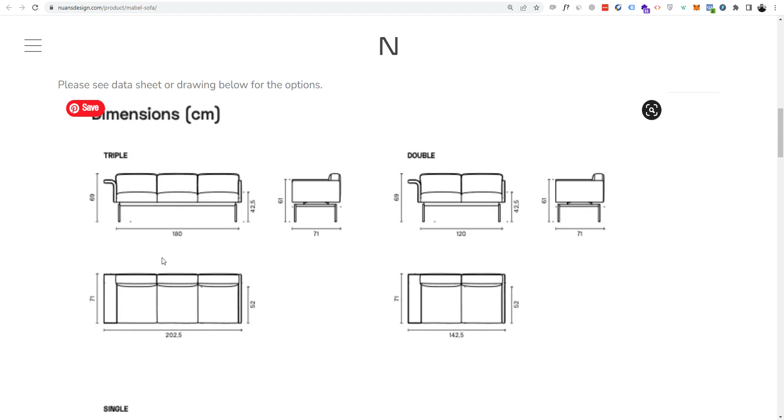We are here on the website where we have some specifications. If I zoom in a little bit, this is 180 centimeters, this is 69 centimeters, and this is 52 and 71 centimeters. I have taken a screenshot and added it in the project files, so you can download it to see the dimensions more clearly: 69, 180, 42, 71 this way, 61 this way. This is going to help us a lot in 3ds Max.

So let's get started. First of all, in 3ds Max, this is how it looks like when you open it. The first thing you are going to do is come here, customize, unit setup, and choose centimeters, and from system units, also choose centimeters. So both places we should have centimeters.

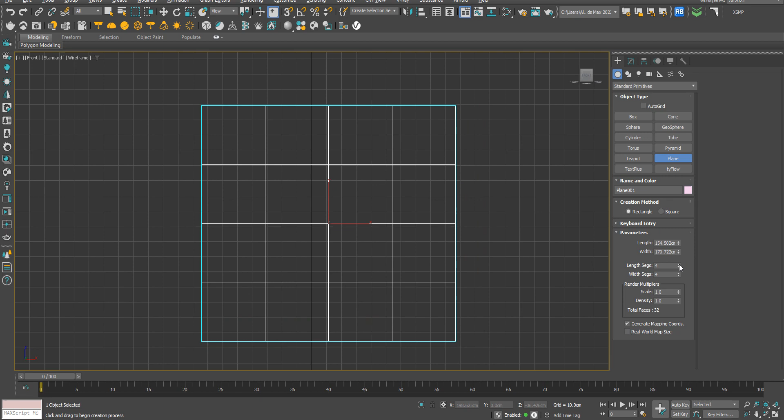Once we have selected that, I am going to press Alt W in the perspective view, which I have selected. This yellow outline indicates that this view is selected. Press Alt W, press F for front view, then plane, and I'm going to draw a plane with length segment 1, width segment 1, and for now let's go with 150 and 150.

I will press F3 to see the shaded view, since this is wireframe view by default. I hope you have gone through the basic lecture of 3ds Max, but yeah, F3 for the shaded view.

Then I press W to activate the move gizmo, and I will right click here on these tiny arrows to bring it into the center. Now you can see our gizmo is exactly in the center.

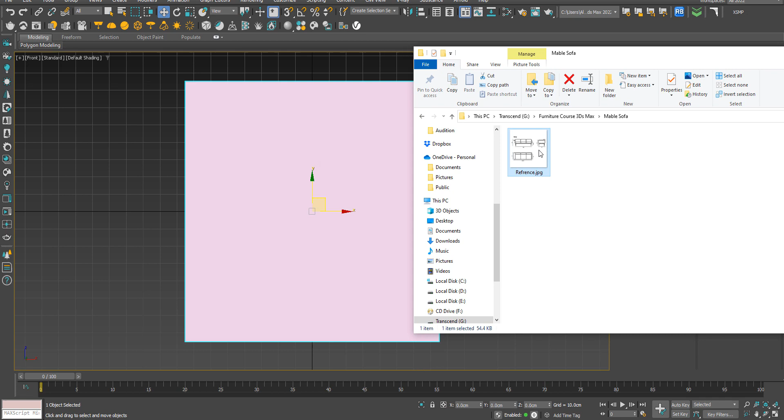So this is the plane we just drew in front view. Now let's drag and drop the reference image which we just created onto the plane.

A lot of my students complain that they are dragging and dropping the image, but it is not displaying. The reason behind this is the plane is not in the shaded view. In wireframe, when you drag and drop, it gives you very different options which are not relevant. So make sure you have the shaded view, and then you drag and drop.

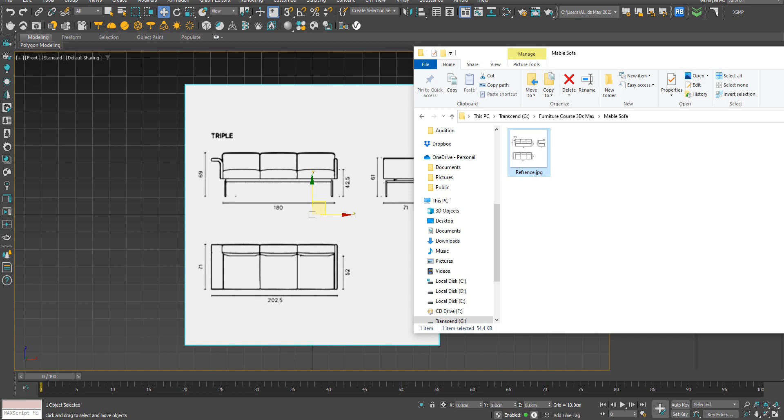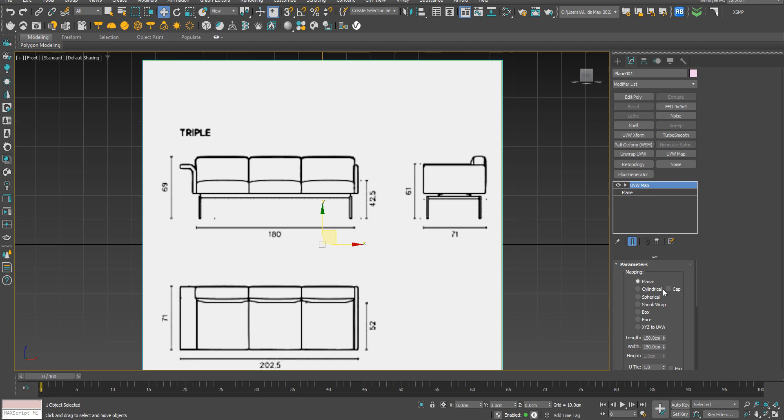Some students complain that this doesn't work even in the shaded view. That is because of the UVW map. We can discuss this later, but right now, if the image doesn't display, or it is multiplied a lot of times, that is because of incorrect mapping. So just apply a UVW map modifier, and this box will be checked. When it is checked, you can see a lot of multiplications, so just make sure you uncheck it. Since I'm not having that issue, I'm going to delete the UVW map, but if the error occurs with you guys, you can do as I suggested.

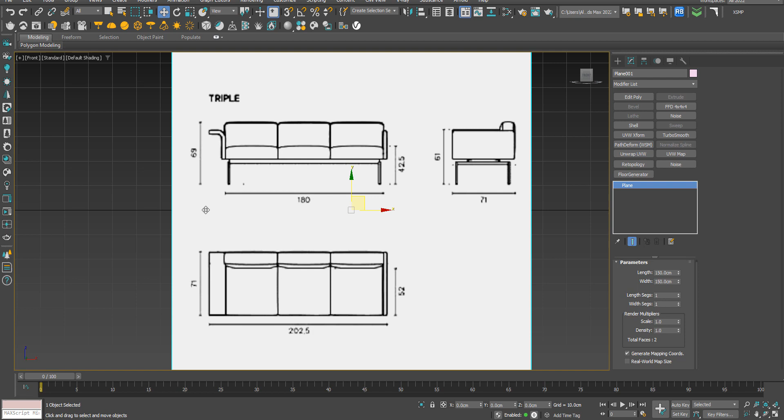So the next thing is we are going to scale the image properly. To scale, I will draw a rectangle, and the width of this rectangle should be 202. Let's see which one we are talking about—not this guy, this guy. All right, it should be 71 by 202.

Even if we do 202, that still works, because even if we scale on just one dimension, that is also fine and it is going to work. Need more... okay, scale it down a bit, a bit more, need to scale a little bit. Perfect. So now you can see this rectangle is equal to 202.5, and that is exactly equal to the width, which means our image is properly scaled.

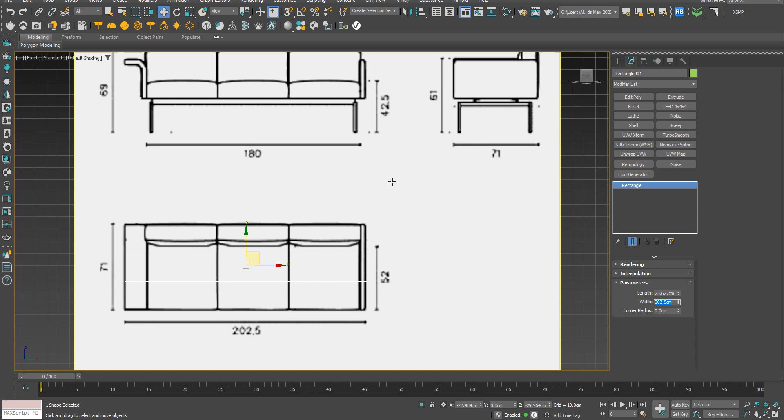Now whatever we draw, that will be accurate. To test this, let's do 71 for this length. All right, so you see this is perfectly well balanced.

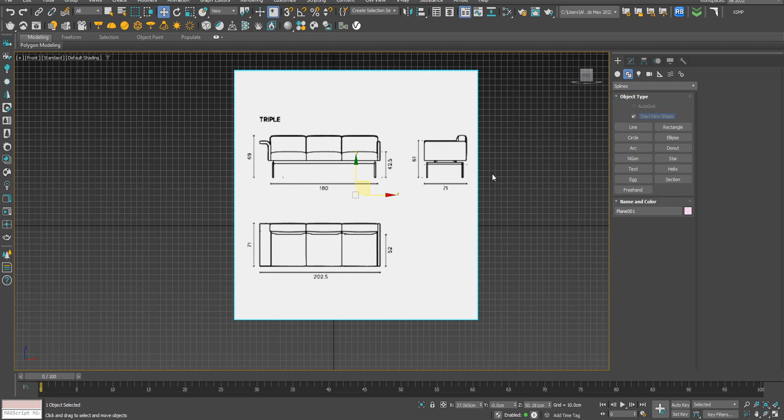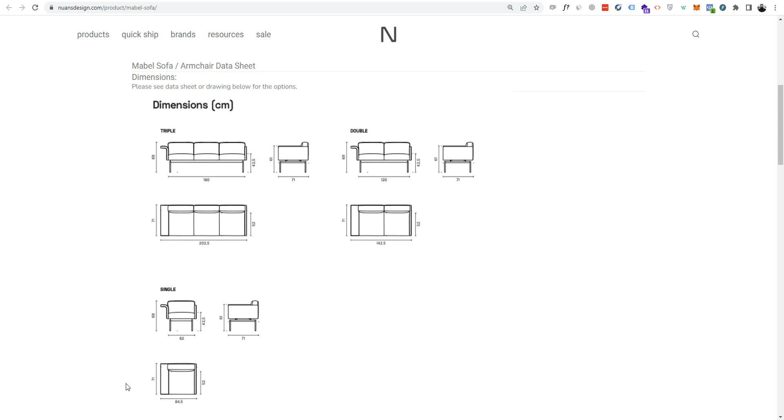Now I am going to delete this rectangle because that was just for scaling purposes, and I'm going to select the plane again, press W and move it into the center again by right clicking here. This is just for my own satisfaction—it's not compulsory that you move it into the center, but it's an additional thing. So let's keep an eye on what we get. First of all, I would like to start from the bottom part, this guy here.

In some of the articles it does have the bottom part, but in some it doesn't. You see, this one has the bottom part, but this article doesn't. I personally like this bottom part, so I would like to create that.

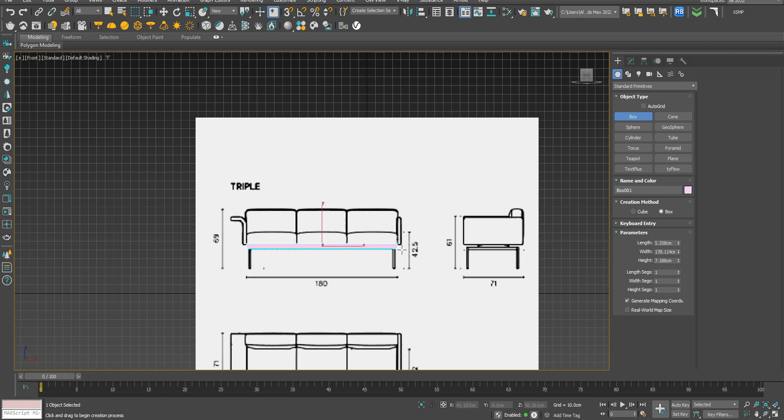Let's create a box and see from where it is. This is from this point to this point. Let's see what is the length - it is about 71 centimeters.

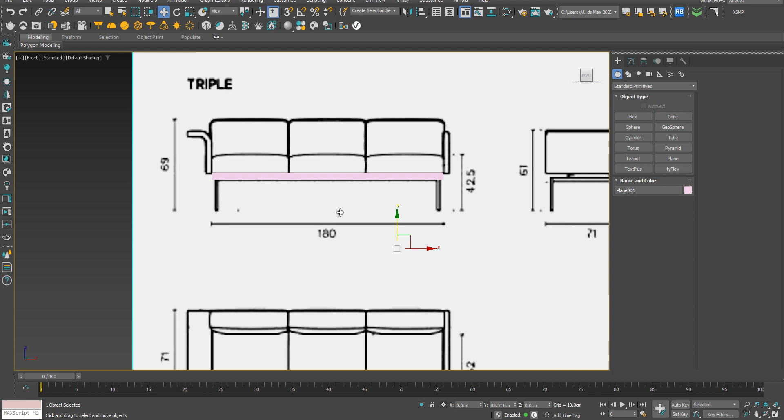Let's see which length is 71. This one is 71 centimeters, let's make it 71. I'm going to move this guy from the top a little backward so I can see everything properly. I'm going to press G to hide the grid. Alright, we have it here. I'm going to change the color of this box so I can easily see what is going on. Perfect.

Next thing I'm going to do is press F4 so I can see the edges in shaded view, plus the edges you can see here. I'm going to right click, convert to editable poly, and then select these edges.

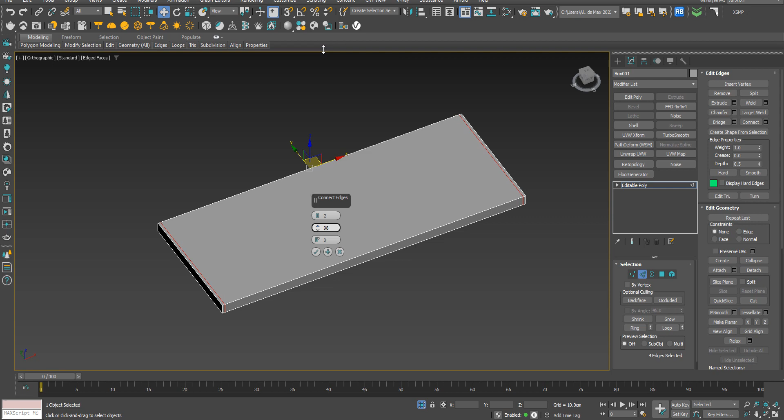In the top view again, I dragged and selected these edges - make sure you follow me. I can see two edges from the front, two edges from back, nothing else selected. I'm going to press connect and set the value of 2 and add the distance of maybe 98. Alright, looks good.

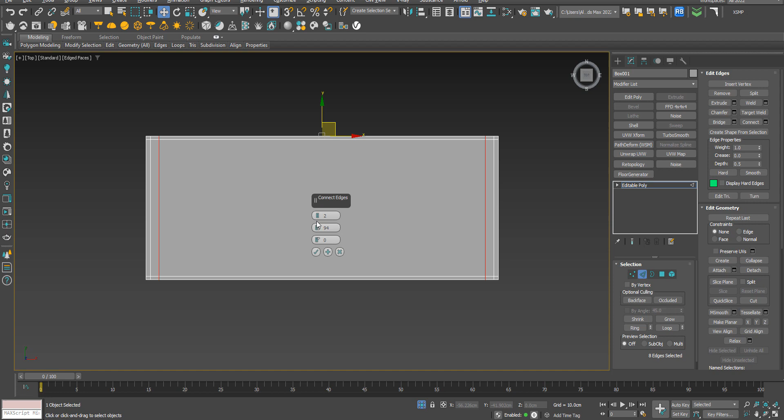Select this guy again, press connect. Now I have all the edges on the left and right, no edges from the top or bottom, just right, and press connect. Okay, boom. Select the guy here, connect again, and now let's make it maybe 3.

I will explain in a couple of minutes why I have added the additional edges. Select this guy again, press connect, and maybe make it... okay, perfect.

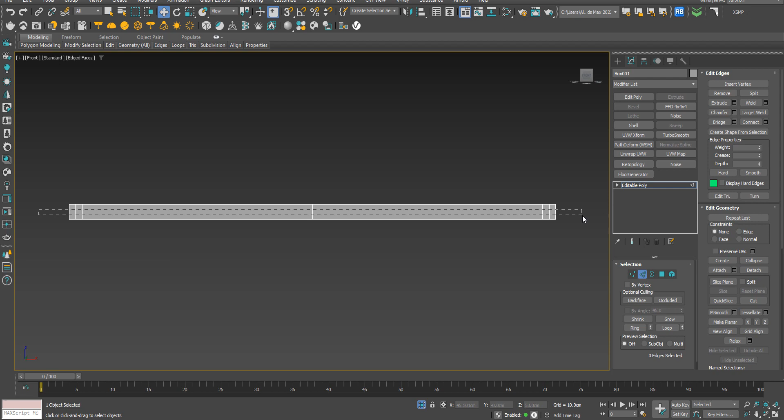In the front again, select these guys. Make sure you have these guys, not any of the edges from the top, only the ones in the front and the back. The other way of selection is you select one edge and click on this ring button, so it will select all the edges around.

Let's apply TurboSmooth now and see how it looks like. Okay, let's see in the real one. Perfect, that is very well balanced, I think. I'm pretty much satisfied with what we have here. Maybe we can increase the iterations to 2, press F4. Yeah, looks really good to me.

The next step is, if we see in the real one, we have this piece here, so we are going to make that one. So I am going to create a box. Do you guys remember what was the width of this? Okay, no problem, we can create a box.

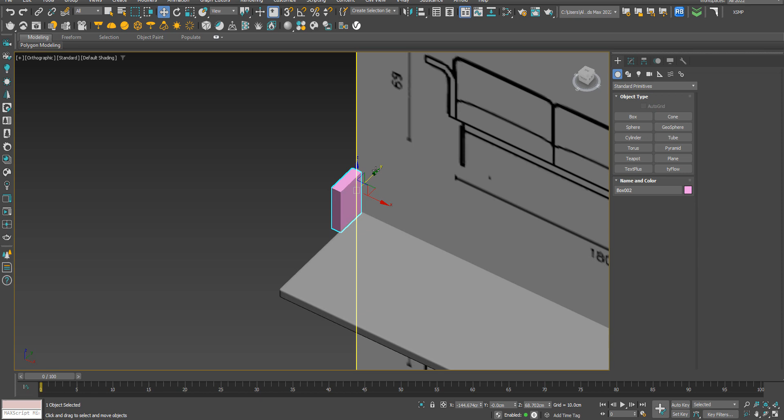Sorry, simply select and drag, and on the third click let's move it. Instead of moving, let's add the width, which we added - 71 centimeters. Which one was that? No, this one - 71. Perfect.

Very, very well done. And this guy here, I think we should keep it 5. Maybe we can increase this later, but if we want to check what really it is, we can rotate it 90 degrees, and yeah, I think that's pretty much 5.

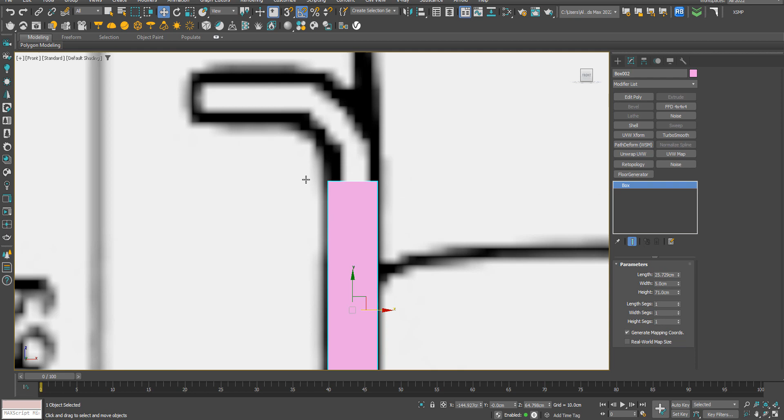Alright, press Ctrl Z, move it slightly there. So let's add edit poly modifier. If you add edit poly, or you right click and convert to edit poly, that's pretty much the same - there's just a very slight difference, but that's really up to you.

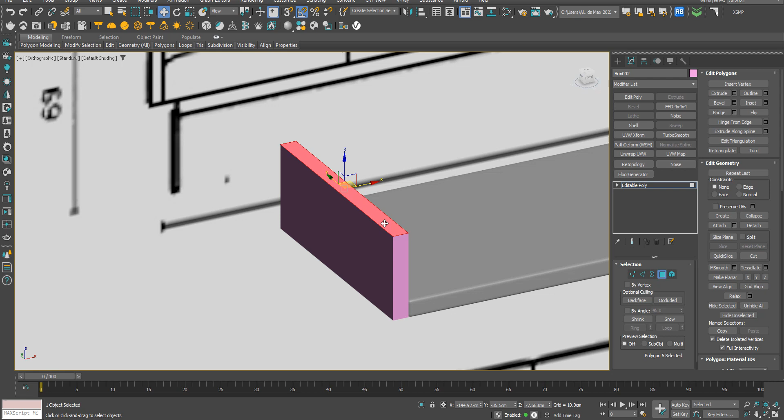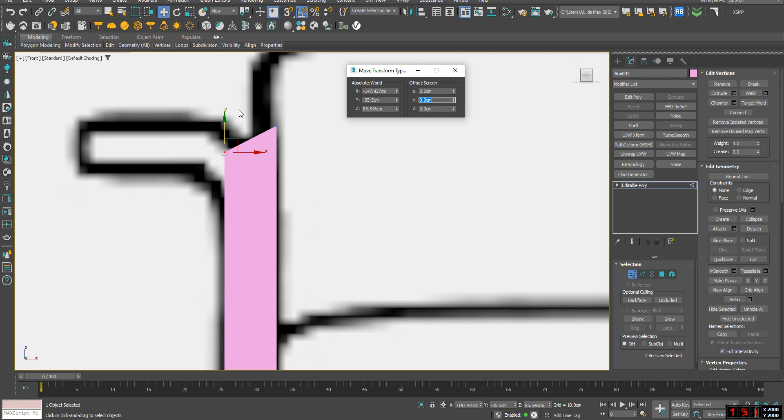Alright, so I have selected this face and deleted it. Boom. The next thing is I am going to move this guy here. Select this guy here and let's move it 2.5, minus 2.5 on the y-axis. Alright, let's see how this goes. We can redo it, but no, that's all right.

So let's do one thing - I have selected the edges. Press F4 and change the color to gray. Alright.

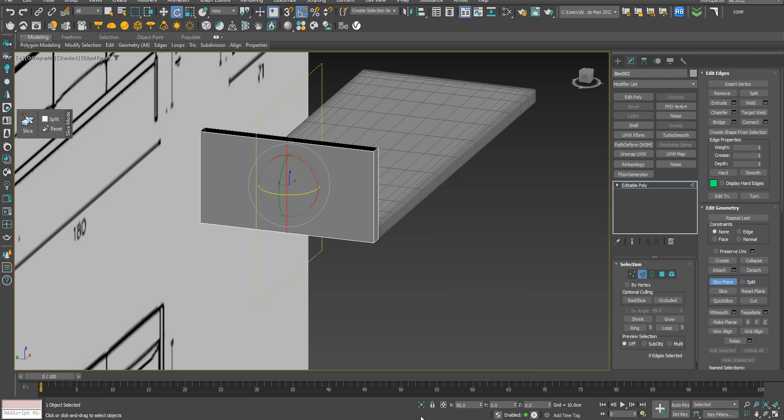The next thing is I am going to use slice plane, so it is going to cut on our required point. Let me explain what happens. I have this plane here which is cutting, so I'm going to isolate with this button. Okay, perfect, isolated. Now slice plane, and now you can see this is a plane which is going to cut - but I don't want a cut in this way, so I will rotate this plane 90 degrees. You can see in the bottom the exact number. It should be 90. If you don't have the exact number, just press A - it will toggle the angle snap, so it will be easy for you guys to snap it correctly.

So this way, and then I will add 45 degrees this way. Perfect, move it up.

All right, now I am going to click on the slice. That confirms our slice is in. Now I'm going to delete this guy here, and we have this, which looks pretty good, honestly.

The next thing is we are going to select the border. So you can see I have selected all the borders. Press and hold shift and move this on the x-axis. Make sure you move on the right axis, this is very necessary. Move this guy a little bit up, and this guy here move it backwards.

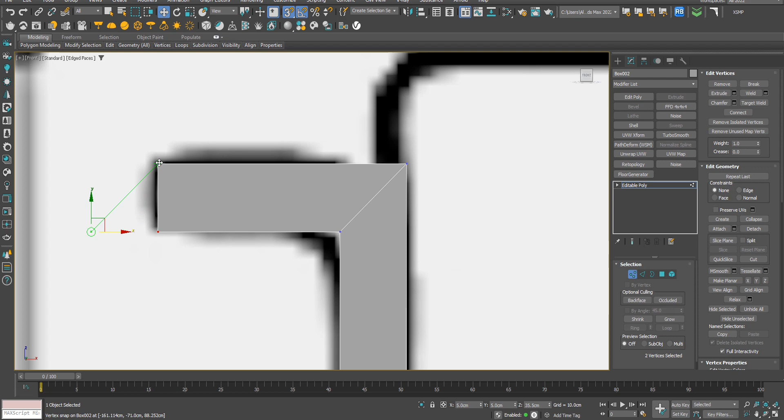Press S for snapping, so you see I have only x-axis active. Make sure when you are moving on the snap, do not click here like this, otherwise you will mess up. Just click on the axis you want to move. I want to move it on the x-axis, and snap it with this guy here, so it's exactly well balanced. Perfect, so I'm going to move slightly outside on x-axis.

Now the most important stuff, I selected this guy, double click on the edge, so I need to make sure that all the loop is selected, right? The next step is I'm going to press chamfer. Okay, here it is. Click on the box and add some amount here.

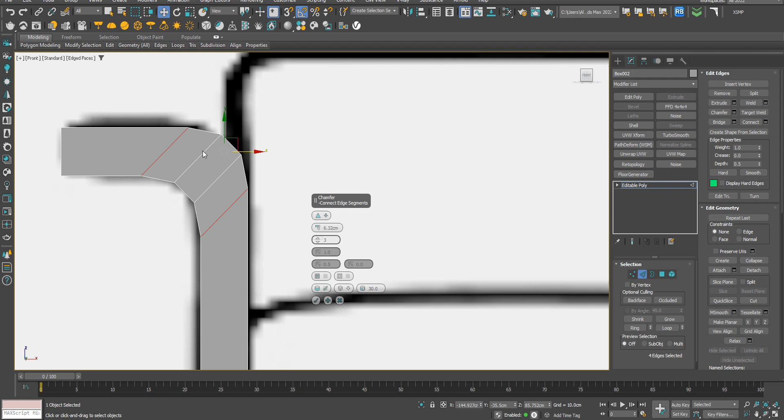All right, let's make it triangle and add another, perfect, maybe 3. There are a couple of options you can try: uniform, radial, patch, whatever you want, but let's go for the triangle. Maybe 2 segments would be enough, or maybe 3.

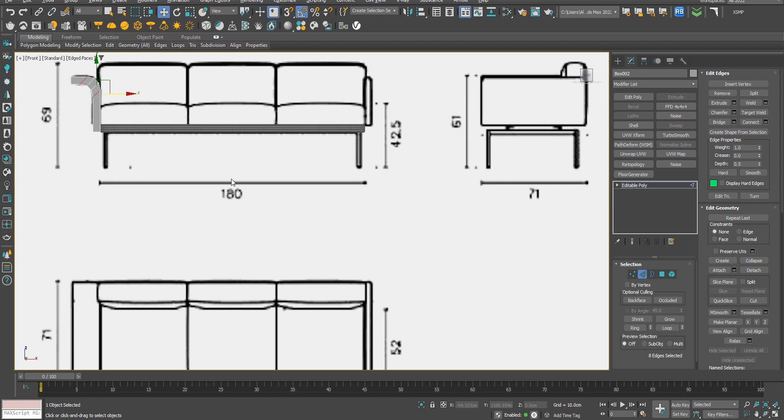This is pretty good, press OK. Now we have this, but the only thing is this part is slightly bigger, this area is slightly bigger than the rest. So what we are going to do, maybe adjust the inner guys, and if we need we can adjust the outer as well later.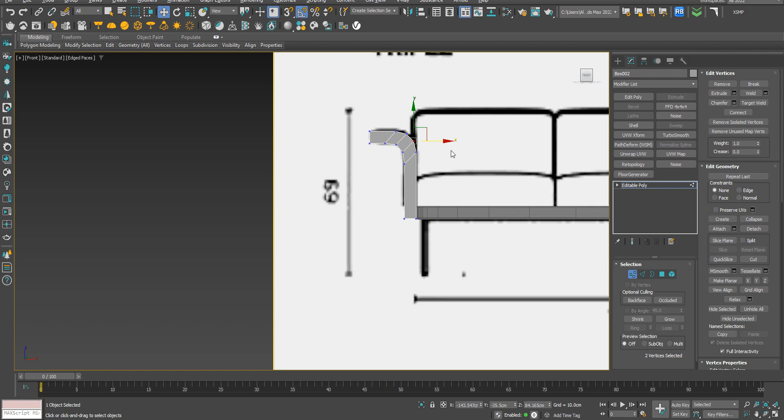Just to make sure to bring it a little closer, so the inner part doesn't feel very bad or big. Perfect. So if we see, now that is a little soft from the front side and from the right side. That's not very sharp.

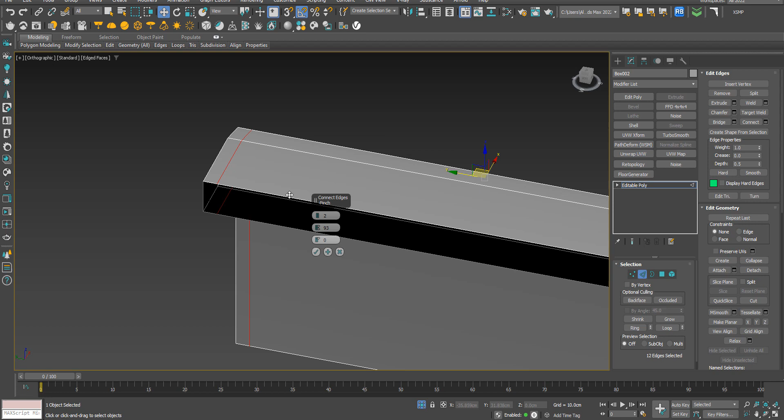What we're going to do is isolate this guy here, and we are going to do some magic. Select these edges, do connect again, 2, 3 maybe, okay for 2 for now. Later we can do 3. I did 3, yeah, I think that would be sufficient.

Connect again, 2, 3, and reduce a bit. Okay, perfect.

Then select these dudes here, and from the front connect again, let's make it 1, maybe 2, and reduce this distance. All right, and just select, double click and select this guy here, the whole loop, and press R and scale it on the z-axis so it is straight a bit.

Okay, looks good to me, honestly. A little bit lower, and I think this guy here should move little upwards. Same for this guy. Okay, yeah, looks perfect.

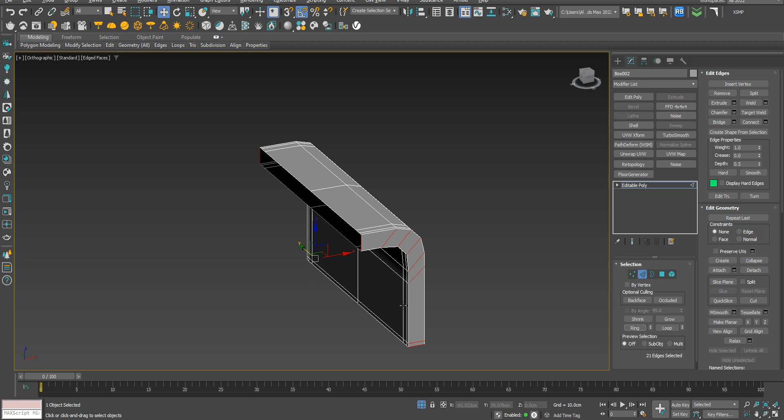Next thing is we are going to select this edge and select the ring, so everything is selected from here to there. Okay, now press connect, and let's make it 3.

All right, sounds good. And I would like to add one more edge here. I'm going to select this, connect. Now I'm going to add one, and make it straight with the scale, pressing R, and scale it down, move it down a bit.

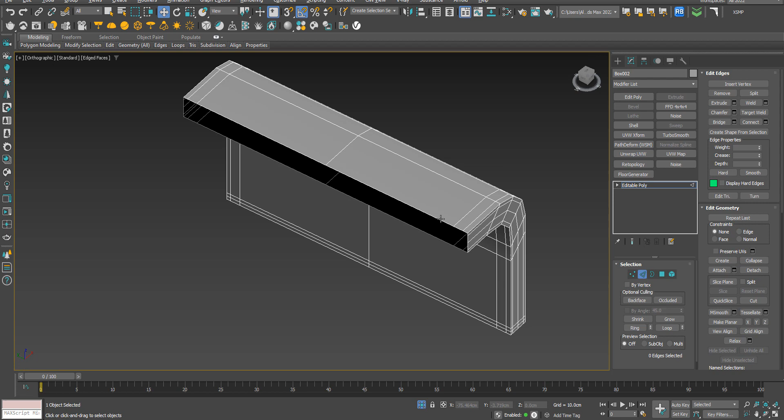I'm pretty much satisfied honestly, but let's try TurboSmooth, see how it looks with 2 iterations. Looks good, but the only thing is this part is still slightly bigger, as we were discussing earlier. This guy here is slightly bigger, so we are going to adjust it a bit.

Select this and move it this way. This.

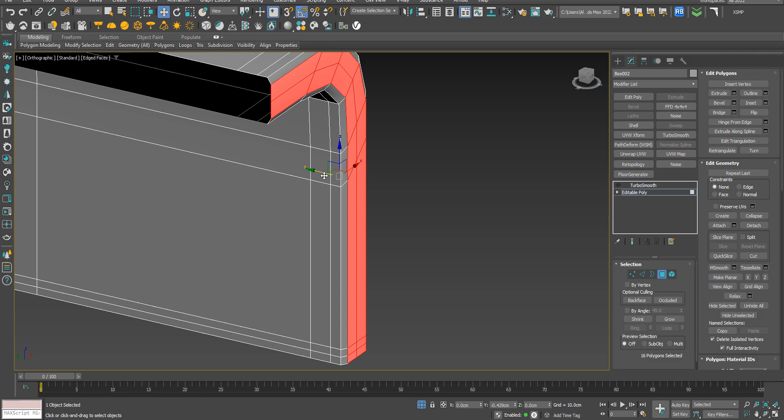Another thing I think we should be doing is, let me select this guy here, and push it slightly outwards so it feels like a round shape. That will look really amazing when we TurboSmooth it. Okay, yeah, looks really good.

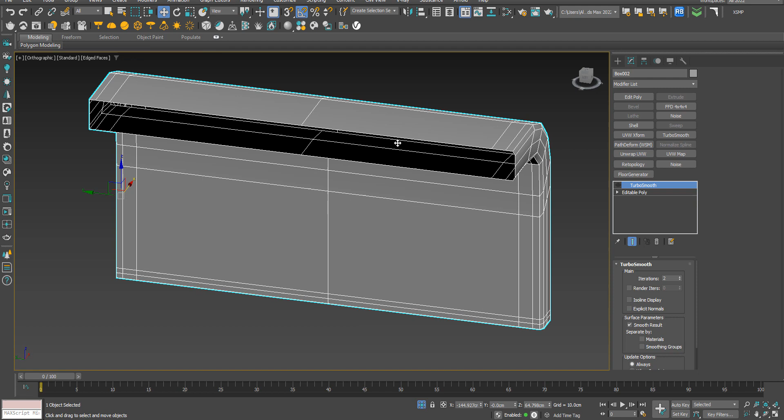All right, the next thing is we are going to close this edge. So come to the edit poly, select this edge and this edge, press bridge, this edge and this edge, press bridge, this guy and this guy, press bridge, and this guy here should be cap. Perfect.

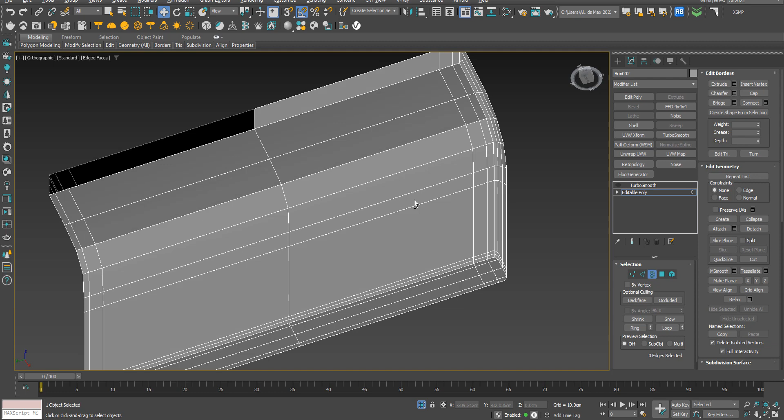So this guy, this should be bridge. This, sorry, should be bridge. Should be bridge. All right.

The next thing is we are going to connect these edges. Say cut, and you cut it from here to here. Okay, sorry. So you have to be very careful, it's not cutting right actually.

Control Z. Okay, let's do the left view, and now cut it from here to here. No, wow, sometimes 3ds Max sucks. Boom, good.

Then let's do the same. Good. And the same for this guy.

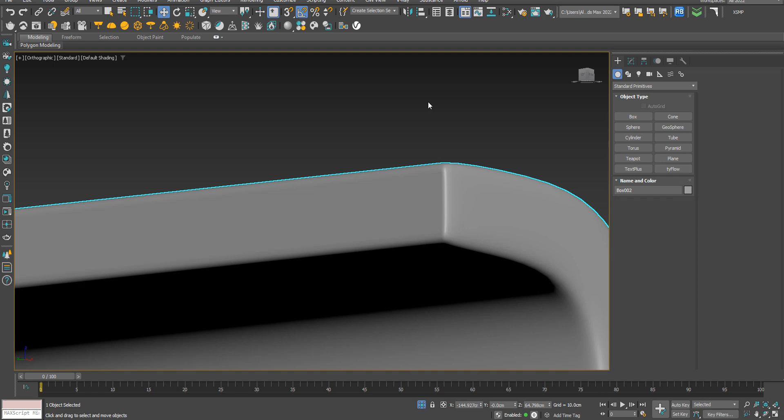Alright, another thing, we can maybe delete these dudes here, but let's see how it goes with the turbo smooth. Alright, I think that's pretty smooth. We really don't need any, but we can delete this guy here, that's creating a mess, honestly. Let's see how it goes.

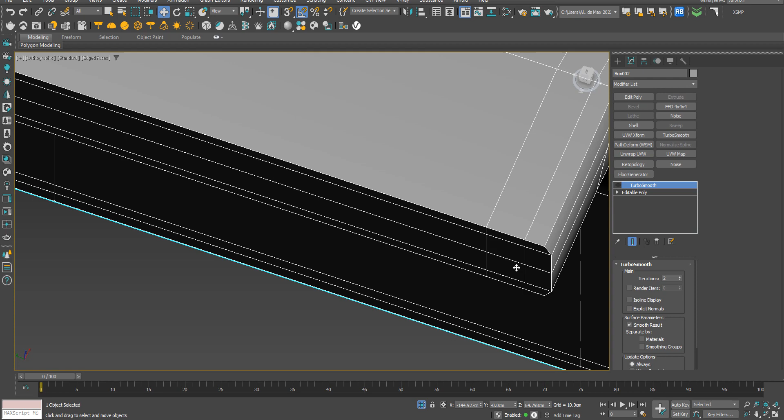This part is not quite smooth, so maybe we can move this guy, this guy slightly closer, or maybe the whole guy. Alright, looks pretty good to me, honestly.

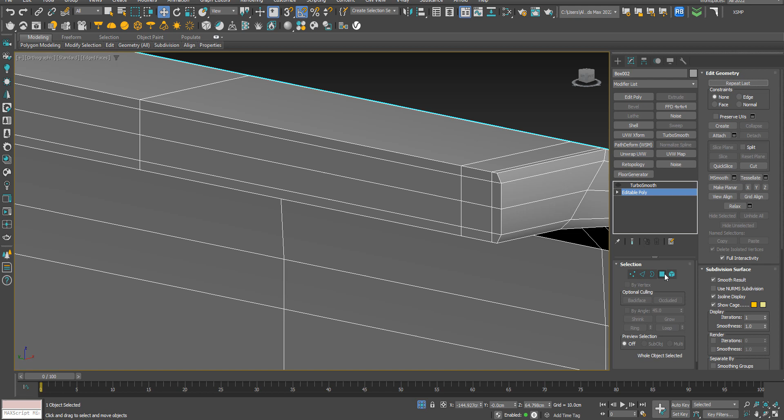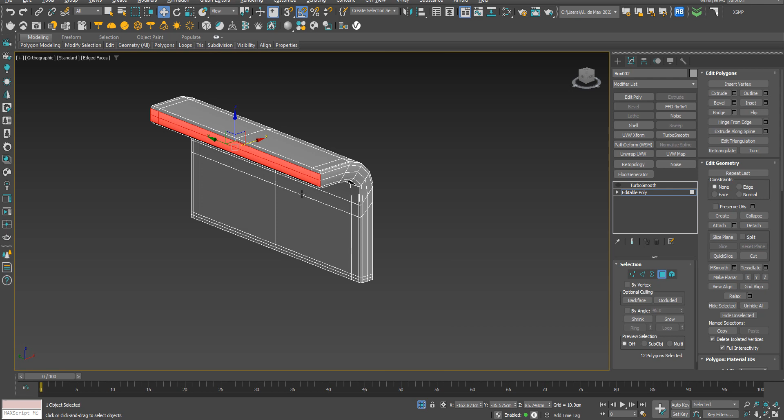And turbo smooth. Boom. Now maybe we can do the same thing we did previously for the middle part. This guy, this guy, this guy. Come to the top and maybe move slightly outwards, just like the front part. This will give a nice smooth curve, you know. Well, let's see turbo smooth.

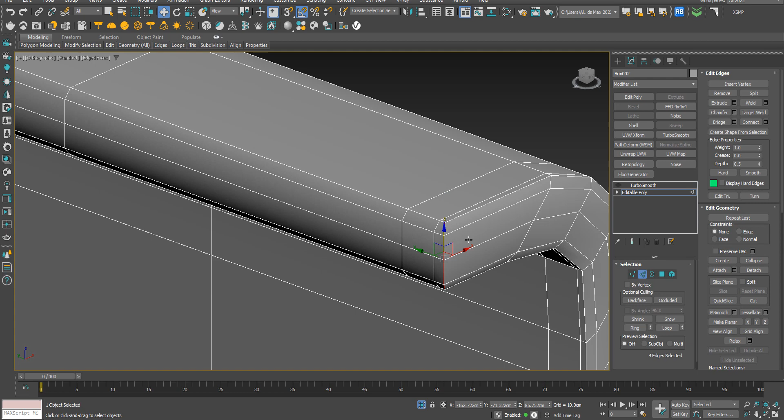Alright, let's see what's happening in the real photo. That sounds really good. If we want to further smooth this guy, what we can do is we can just select and press chamfer.

Alright, and move this guy slightly backwards. And let's see how it goes down. I think we unnecessarily gave an extra edge, which was actually not needed. So I'm going to press Ctrl Z, and let's see again. I think this looks good so far.

All right, we have a problem here, which means we didn't weld actually. So maybe we can select this vertex, this guy and this guy, and move them here. The snap. Perfect. And select these guys and press weld. Let's see if it worked. Yeah, that worked.

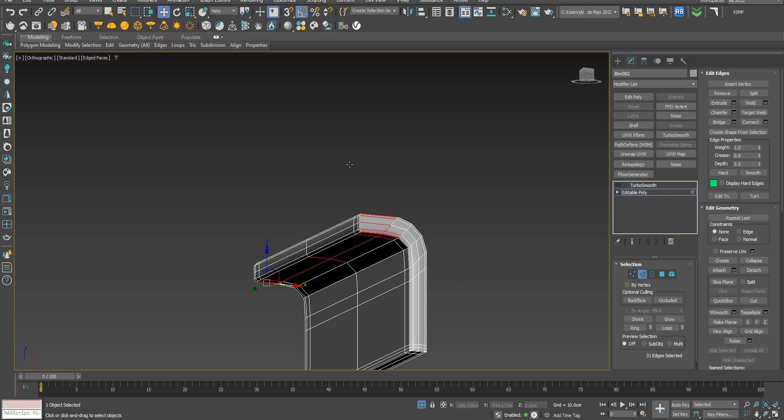So another thing I would like to do is I would like to connect this guy, maybe from the front, just connect it, and maybe let's move it. No, need only one, and let's add the value. Come to the top and press R to scale it on this axis front. Perfect. Let's see. Perfectly balanced shape. All right. Okay, looks good.

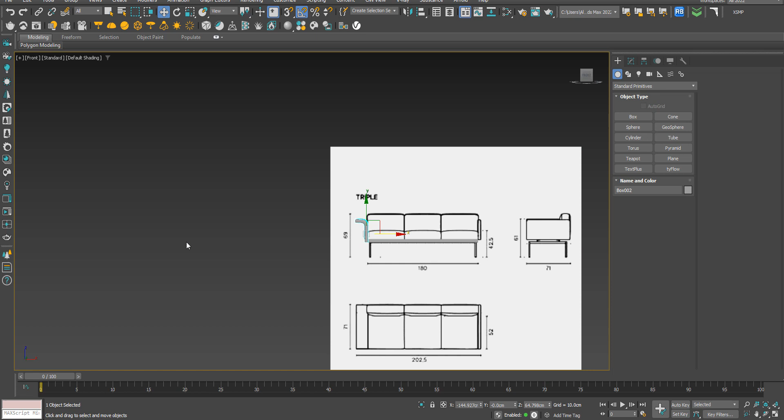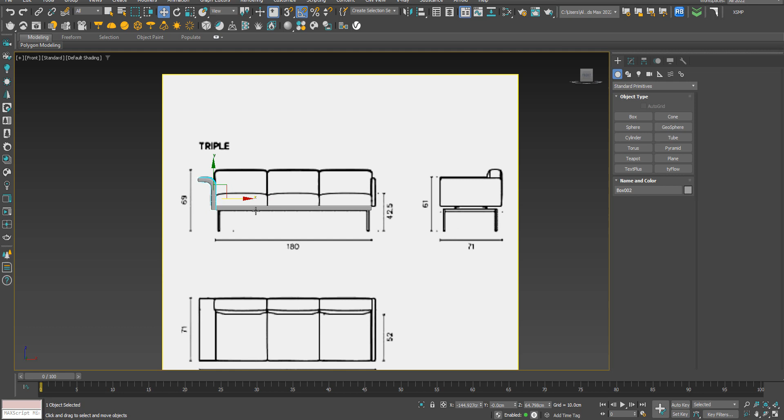So now we are going to make this guy here, which is quite straight and smooth. So the easiest and fastest way is, let's move this dude here, copy it, isolate this guy, turn off the turbo smooth. Alright, let's select these faces, delete, delete, and this guy too.

Okay, so we have this now here, and select the border and scale it down on the y-axis, so just to make it straight. Next thing is, let's mirror this on y-axis and make a copy. Perfect. W, move it here. Since we copied, so we can attach. Make sure you copied. If you have had instance, just make sure to press this button, unique. This is necessary. Attach. Okay, boom.

Now it's attached. Isolate again. Right. Select these vertices and maybe weld. Perfect. Good. Let's apply turbo smooth. Okay. Looks good to me, honestly. Just one thing, I made it slightly bigger, so let's move the vertices slightly downwards.

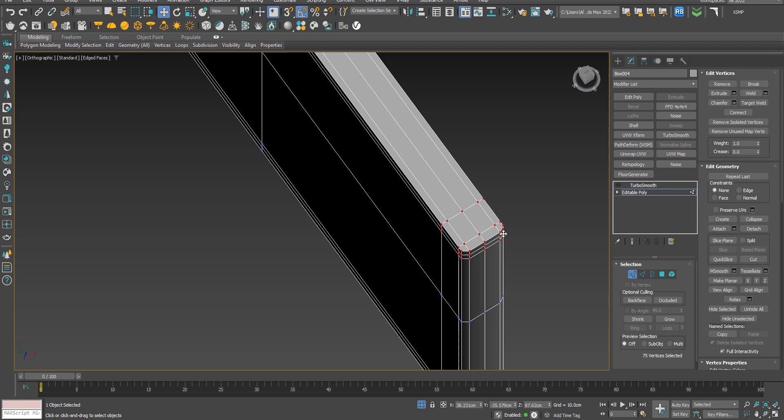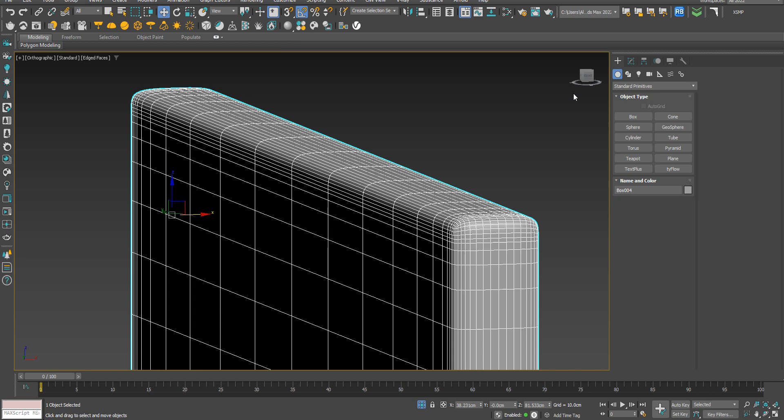Perfect. Another thing, let's press F4 to see the edges. We need to move these faces upward, just like we did previously. Slightly upward. Alright, apply TurboSmooth. Perfect. Looks so smooth, just like butter.

So let's save the progress for now. Sorry.

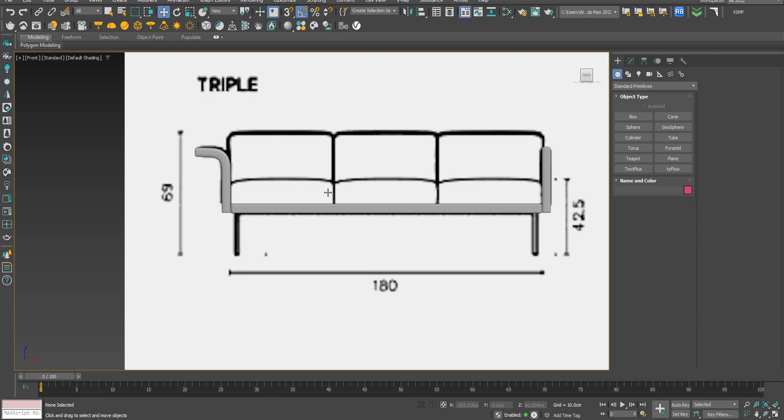Alright, sounds fair enough. The next thing is, let's see. So we are going to make this guy here with the help of a box. So maybe we can start from the top, and

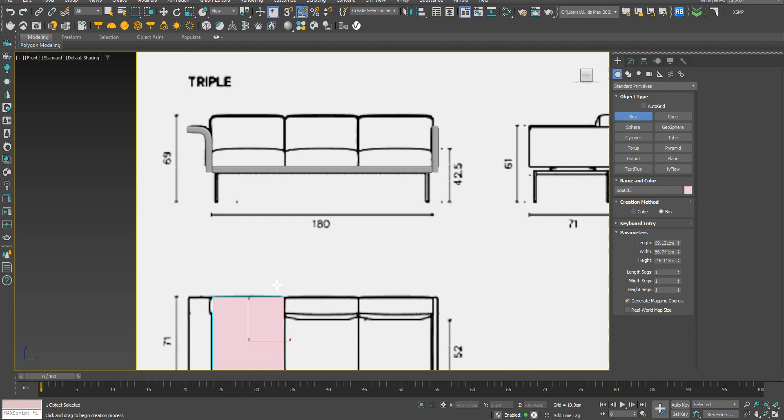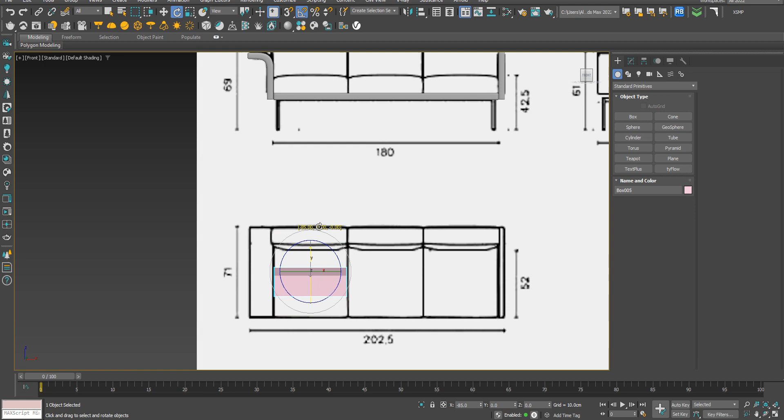This should be about 71. Okay, just remember that this time we are making the top, the box. Okay, the width is okay now. We can maybe rotate it on 90 degrees and move it up. Here, and adjust the height. That should be like, for now we can try 15, and we can amend later, maybe 13. Alright.

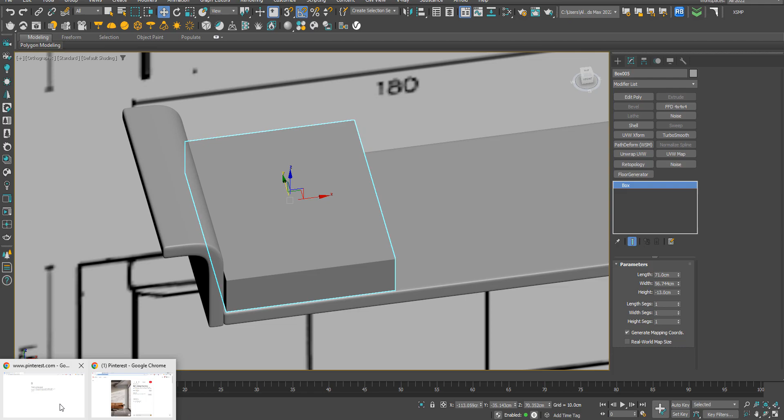The top, I move it like this. Perfect. Going to change the color. Let's keep looking at this sample so we have an idea what exactly is going on.

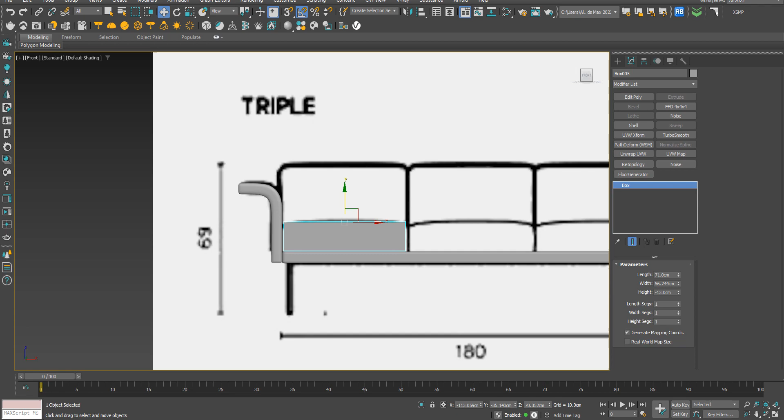Alright, might be you see a little difference because I think the sofa we see here, that is this guy here, the two-seater, but we are making the three-seater. So that's fine. That's totally fine.

Let's isolate this guy. Press F4 to see the edge view. Perfect. Apply edit poly modifier. You can see it in the modifier list. If you don't, simply right click, convert to editable poly. That also works. So select the edges, connect, only one for now. Same goes for this way. Connect, only one for now. Perfect. The next thing is I'm going to delete this guy and this guy.

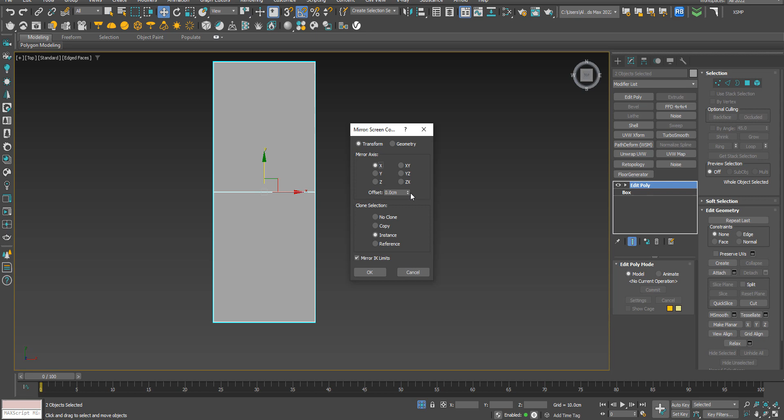You will understand shortly why I did that. Mirror. This time make sure you select instance. Okay. Select the two guys. Mirror again. On x-axis, let's add the distance. Okay.

Alright. So we have this dude here. Convert, select this edge and press connect. Now you see I am editing one box, but the action or all of them are being modified, you know. This is very cool. 4, this way we can connect again, maybe 3. Okay, looks good to me. This way maybe we can connect 2. All right, let's see, keep an eye.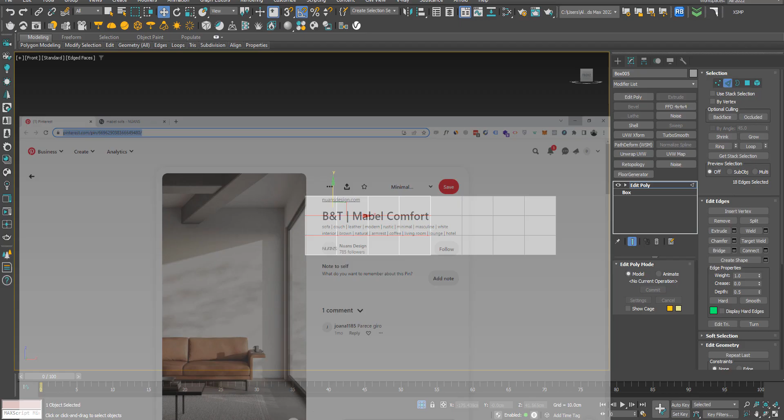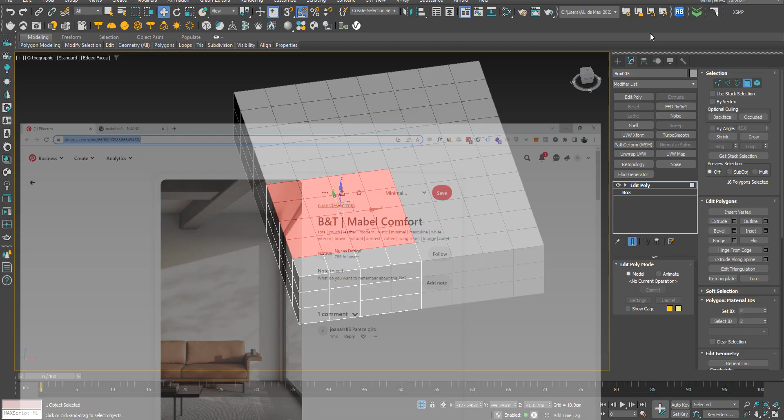All right, the next thing is, let's select this guy here, this face, and press grow. Okay, so slightly confused here. Let's do one thing, and that is connecting these edges.

So select these guys, press connect, make a, okay, one, maybe one, give a distance, same for this guy here. Okay, wait a minute. Select this guy, connect. Okay, select again, connect. Okay.

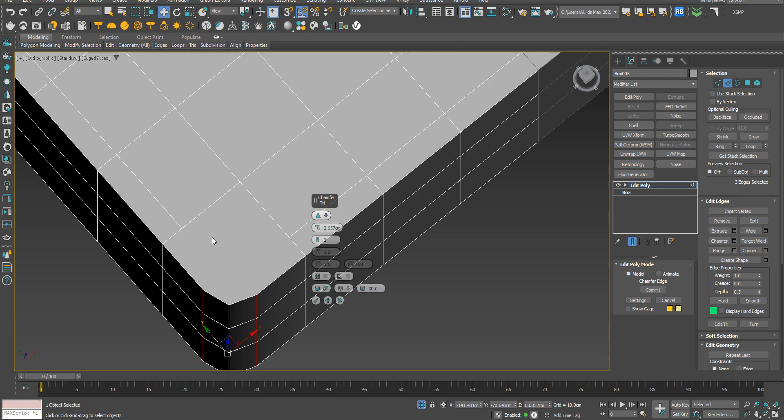Now let's select this guy at the corner and press chamfer. The triangle. Maybe 2. Alright, looks good. Next step is, let's select this guy here and press cut. Oh, sorry.

That's hectic, man. No. Okay, let's adjust it a bit. Perfect.

Sound good. Let's select this guy, grow, and manually select this. Move it slightly upward. Shrink. Move it slightly more upward. Shrink once more. Voila, that is done.

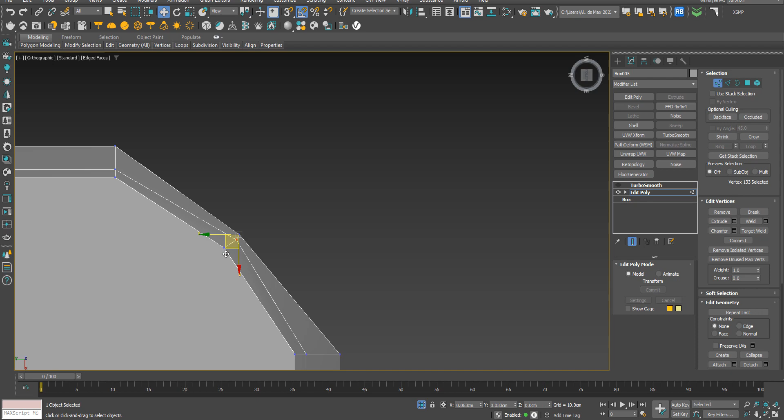Let's do the cut. Okay, this didn't go well. Cut.

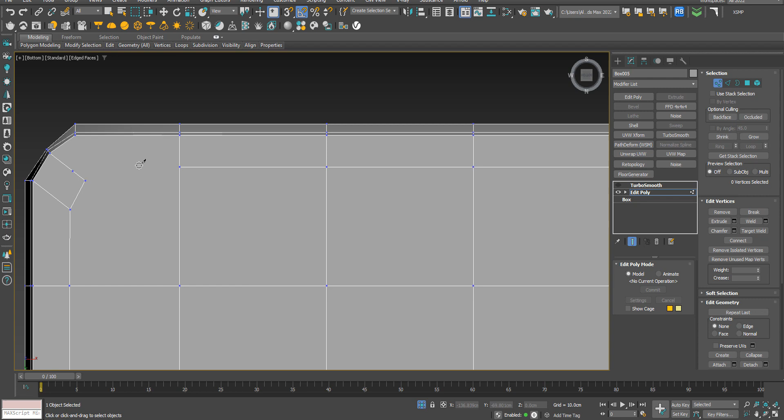Select this guy, press Ctrl backspace to remove and adjust it a bit. Looks fine to me. Let's see turbo smooth.

The bottom looks good to me. Maybe we can try, or maybe we can move this guy slightly downward and see how does this go. Yeah, looks better. I'm still not satisfied with this edge here.

Let's try ring, and press connect. Okay, once at a time. No. So what I'm going to do, I'm going to press Control Backspace.

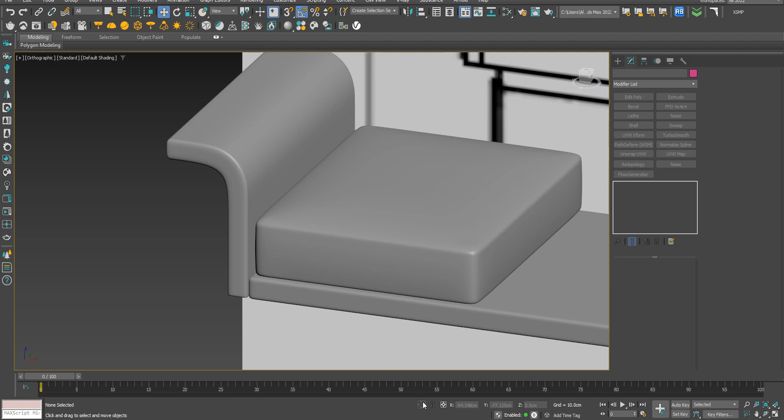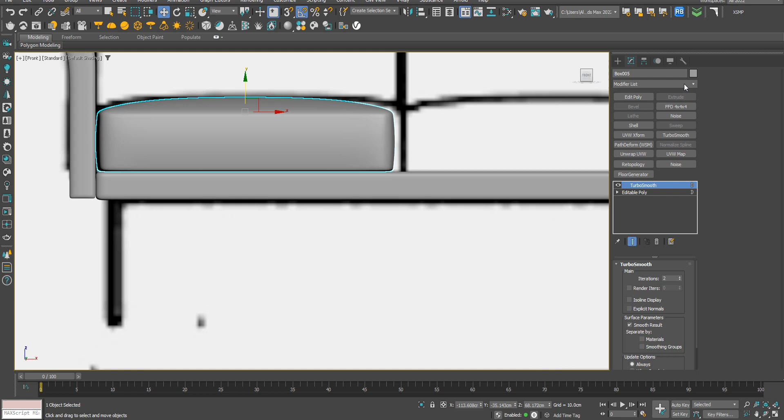Let's copy this guy here. Alright, I think we need to adjust a bit because that's slightly smaller. Let's scale it down a bit also. Alright, let's apply FFD 2 by 2 maybe.

Click here, select control points. Alright, where did it go? Something not right. Let's cancel the selections. And FFD, now good, control points. Move it this way.

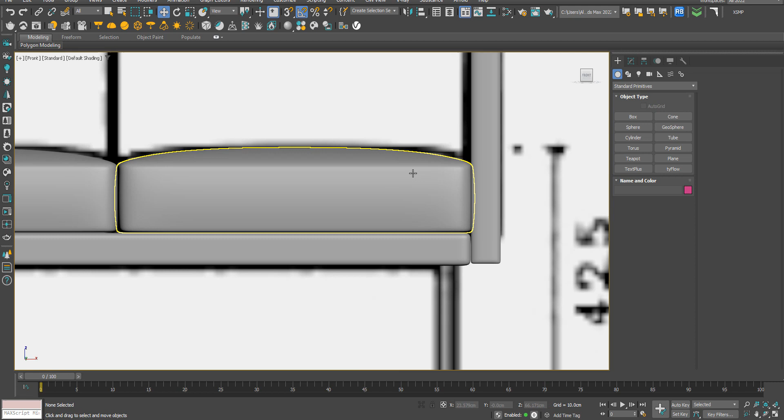Perfect, do the same here, instance. Okay perfect, move it slightly this way. Looks fantastic, honestly. Alright, looks good to me. Next thing, just copy one guy here.

Copy and not instance. So rotate it 90 degrees. Let's place it here, or maybe upwards. And let's turn off turbo smooth.

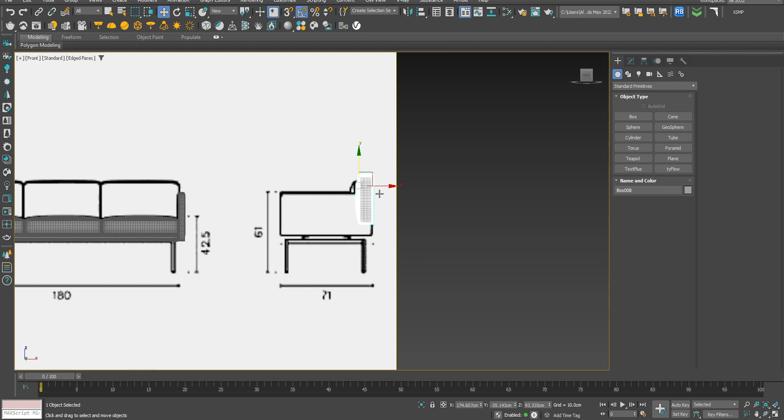Isolate, and let's do one thing. In the edit poly, select this guy, control backspace. So we simply deleted those guys, move it downwards, move it downwards. Okay, let's apply turbo smooth and see how did this go. I think it went really good. Rotate it again 90 degrees.

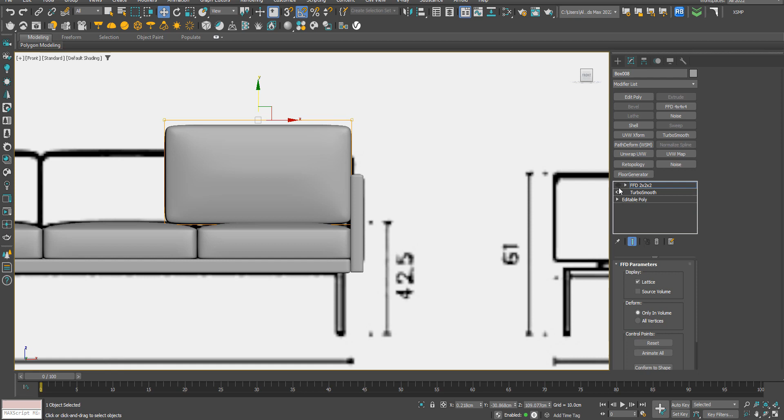Okay, before we do FFD, let's do one more thing. Select this guy, maybe this guy, and this guy, control backspace, and move this guy, and this guy is slightly closer. Sorry.

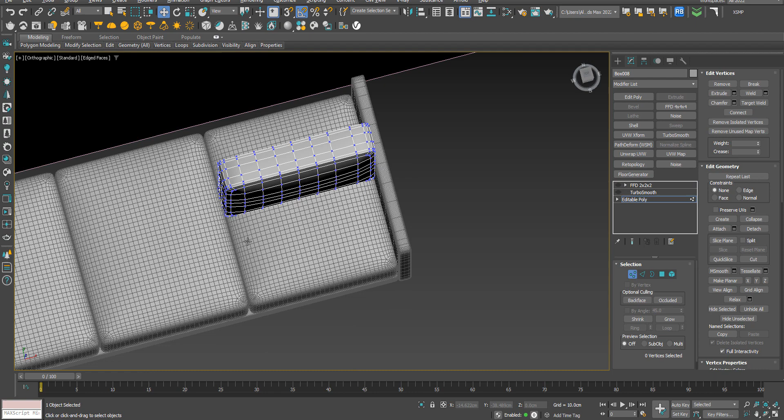I think it looks good to me. Let's apply turbo smooth and see how did it go. Sounds good.

Not that high. Let's apply FFD, select these control points, move it down. Alright, the only thing I see here, there is a kind of bump. So maybe we can see what actually is happening, you know. Alright, we see an unnecessary edge. Control backspace. I think it will be fixed now. Yep.

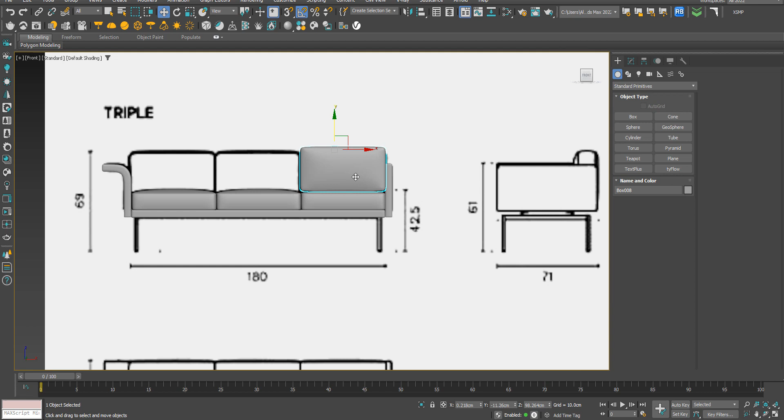All good. Another thing, I would like to scale this, or maybe use FFD 2x2 control points to move backwards. Alright, perfect. Similarly, copy this guy here, instance. Okay.

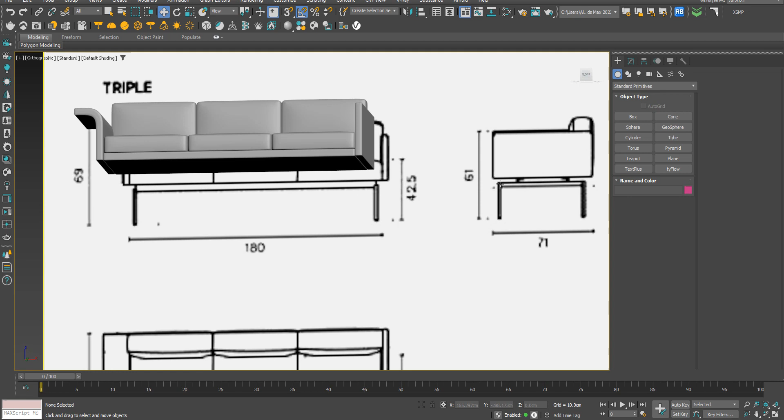So this went really good. So in the next video, we are going to make the legs you see here, and we'll do some marvelous designer stuff. Okay.